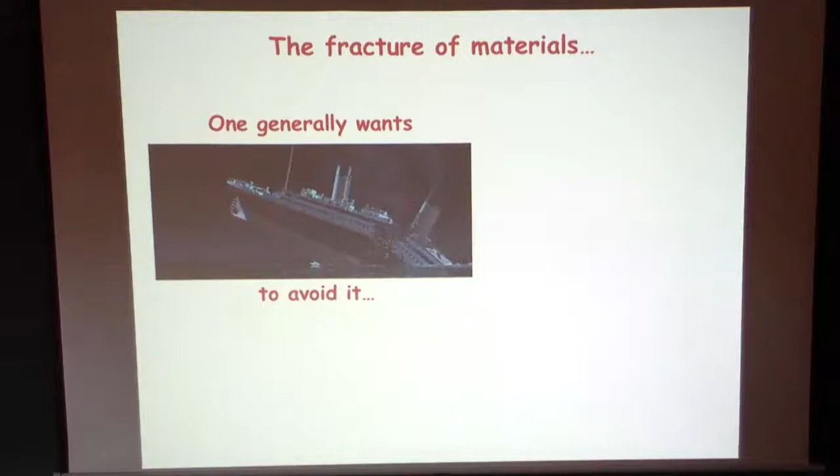So what is the main objective when we work on fracture problems? The main objective is to derive a theory that is predictive, in order to predict and avoid failure. But there is also another aspect - in some systems you want to trigger fracture, or at least manipulate fracture properties of materials.

So on a broader perspective, fracture mechanics deals with predicting fracture and also designing fracture - how to manipulate and control fracture properties of material. When you talk about material design and control, we will see that heterogeneity and disorder of material will play a key role. So we want a theory that takes into account material microstructure.

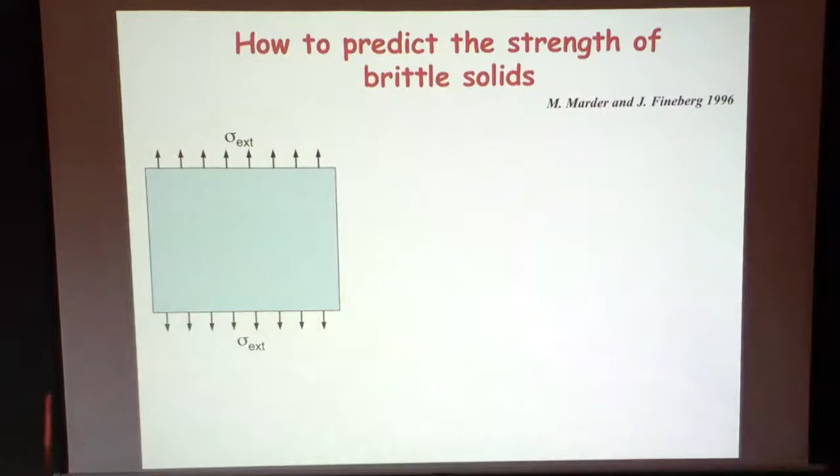All right, let's progress in the development of a predictive theory of fracture. The first naive question we will ask is how to predict the strength of a brittle solid. Here, to start with, I borrow an idea from Jay and Mike Marder that consists of taking the simplest model possible of material - a homogeneous elastic solid made of springs that describe your atomic bonds - and you want to make a prediction from it on your critical stress at failure.

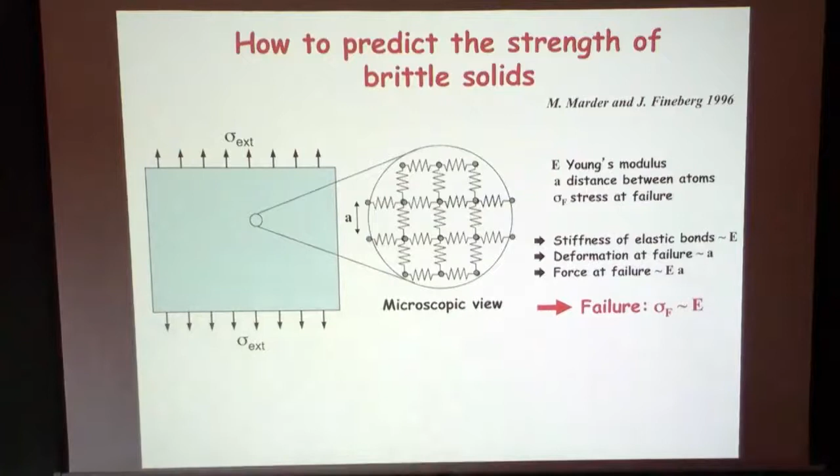You then take a failure criterion based on deformation of the spring, and say that your material will break when springs are deformed over a length typical of the distance between atoms, the interatomic distance. Then you get the stiffness of your spring from the elastic modulus of your material, from the Young's modulus, and you get a failure stress typically of the order of the Young's modulus - maybe Young's modulus over 5 if you make a more elaborate calculation of when two atoms get separated and don't interact with each other anymore.

This prediction is actually quite bad - if you take typical materials, off by about two orders of magnitude. You predict a strength much larger than the actual strength of the material; real strengths are weaker, so failure occurs much before. This is a kind of theoretical strength that is hardly achieved - it can be achieved in some ideal situation with flawless material, but it's not at all the general case.

To go a step further in understanding fracture, you need to introduce a defect - that will be key in the process of fracture. So you introduce a kind of elliptical cavity in your solid, and since you have an elastic material, you can calculate the stress field in this system as you apply a tensile stress on the side of your sample, and show that you have stress concentration, stress amplification, with the amplification factor being 1 over the square root of your curvature.

The local radius of curvature at point A - from this you can clearly see that the actual stress the material undergoes is much higher than the stress you apply on the side, and you start to understand why the strength of material is actually lower than the theoretical strength.

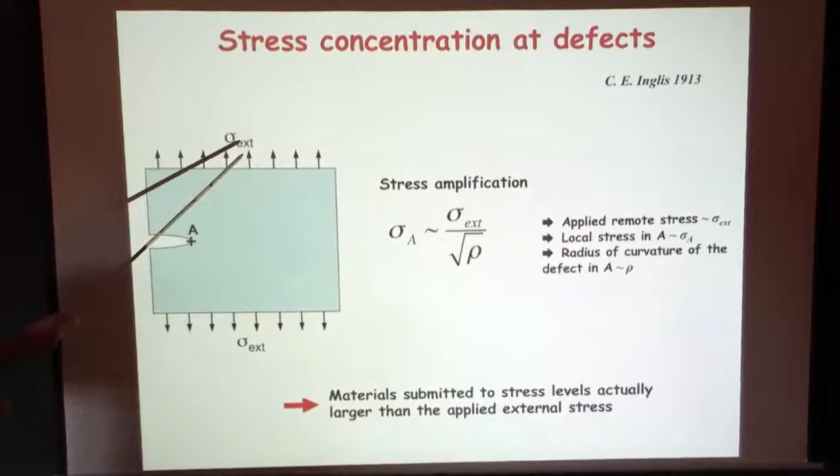So you'll recover the external stress that you're applying. But at the scale of A, or... let's say that if you move from A to a distance of the order of the radius of curvature, you recover the stress. I'm looking really at the tip, but the length scale you talk about is provided here by rho.

On the next it's very different because you cannot go from this one to the next. Since I'm considering only the stress field in A, I need to go: rho tends to 0, I have an infinite stress in A. That is consistent with the result here. At the tip, I have R equals 0, I have an infinite stress. That doesn't tell me so much.

So what's the difference between this model and the previous model? The infinite is zero curvature. Oh, and that's finite curvature. Finite curvature, okay, yeah, exactly. Rho is like microscopic then here, right?

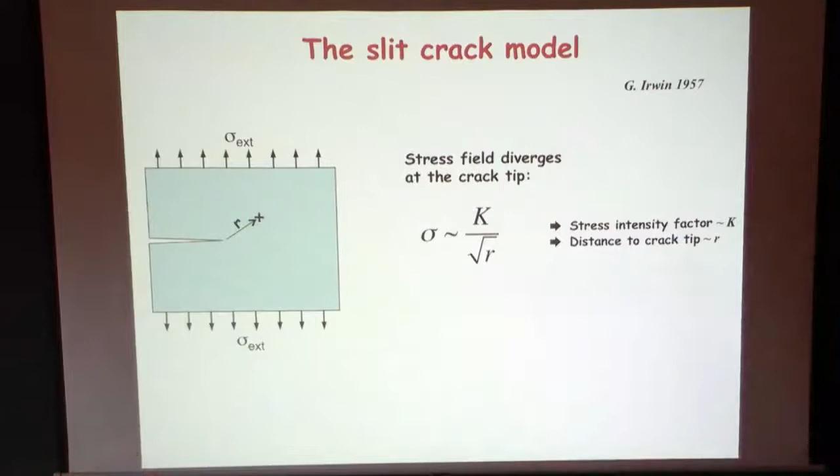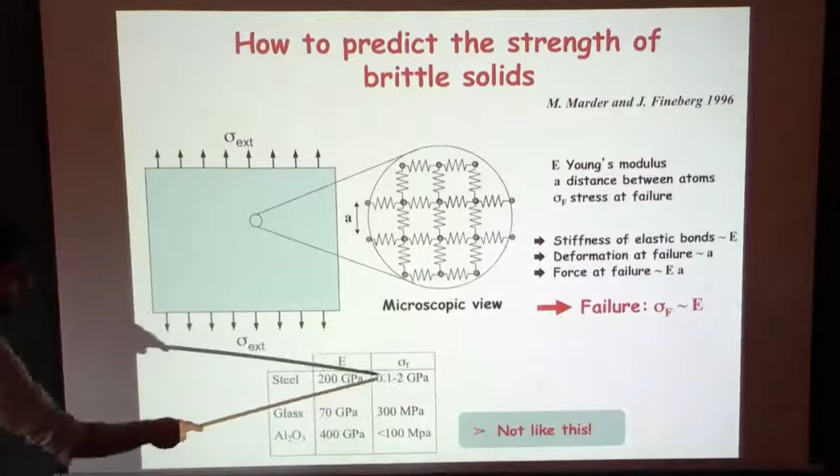Yeah, somehow this model is not completely irrelevant. In any physical problem, you will have a length scale, at least the atomic scale, or you will see later, you will always have a regularization of this singularity through a material length scale. That's not completely irrelevant. Not going to comment too much on that, but if you plug in a typical radius of curvature, you can measure maybe on a crack, you can somehow rationalize a bit the factor, the 2 decades of difference you see between these quantities.

But okay, let's move on. So if you maintain a stress-based criterion with this kind of approach, since the stress field is diverging, you will have actually no resistance to fracture somehow. If I apply just a little stress here, I will have infinite stress here, so I have no reason for the crack to stop growing. It's kind of a naive vision, but with this model, using a stress-based criterion, you will have systematically failure. So it's also not the correct approach.

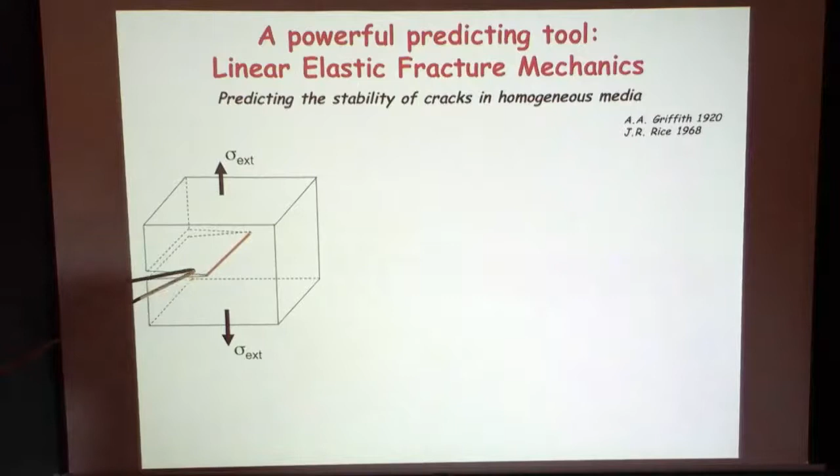Actually, a powerful way to look at the problem is to consider energy transfer, energy balance. When you have a crack in your system that is going to move over some incremental length delta A, instead of looking at the stress field, I'm going to look at energy variation. During this propagation, I have the work of the external force that is going to balance the variation of elastic energy in the solid that is under some stress, and a variation in surface energy, or an increase in terms of dissipation, because you propagate a crack, or you create new surfaces. This costs you some energy, which I note delta ES.

The idea to look at this problem is not to look at energy variation, but rate of energy dissipated, or rate of energy released. To look at rate, you gather these two terms that correspond to the mechanical energy of your system, and you look at the variation of this term normalized by the surface of propagation, delta A times B.

Same thing for the dissipation. Instead of looking at delta ES, I'm going to normalize it by the surface over which the crack moved, and I'm going to have a rate of energy dissipated to make the crack propagate over some unit surface. So I have my relevant quantities, fracture energy, elastic energy release rate.

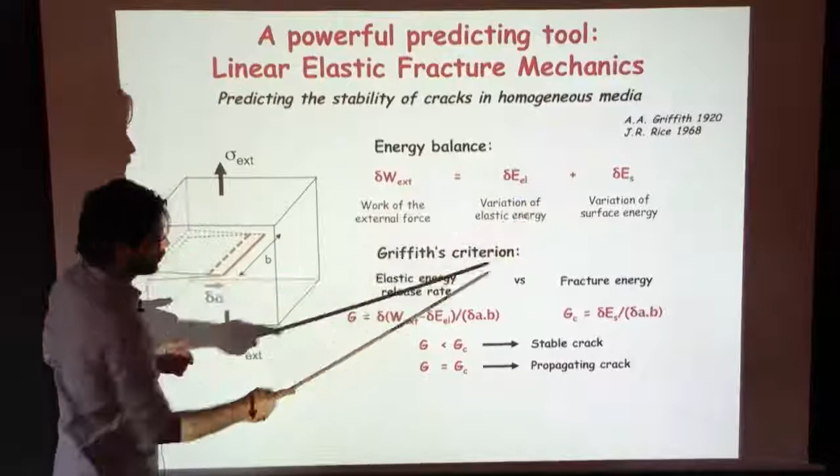From this, if you have crack propagation, if you have crack advance, then your energy balance is satisfied, and so you have G equal GC. If you have propagation, you necessarily have G equal GC. If G is smaller than GC, then the crack cannot propagate - you have your thermodynamical driving force lower than your rate of dissipation you need to plug into your system to make the crack propagate. You have a stable crack. So this is the concept of Griffith's criterion - fracture mechanics is telling you if a crack is stable or not, more or less.

The one comment I have about this is when one talks about the surface energy, one is not talking about a sharp mathematical surface. One basically has a region where elasticity works - it breaks down on small scales. You're saying, I know how to calculate the elastic energy from the large scales, so everything at the small scales that's hard, I'm calling surface. The crack may move across and it may disrupt a volume that's micrometers on either side from the crack's face, but that's all thrown into the surface.

Did I mention predicting the stability of brittle cracks? This approach can fail if you have ductile failure, if you have dissipation in the volume. But as long as it's confined to 10 micrometers or something, it's fine - quite big compared to atoms, it still works, right? Yeah, but in ductile failure you have a growing - it's the whole volume that fails. But that's a good point, and we come to that.

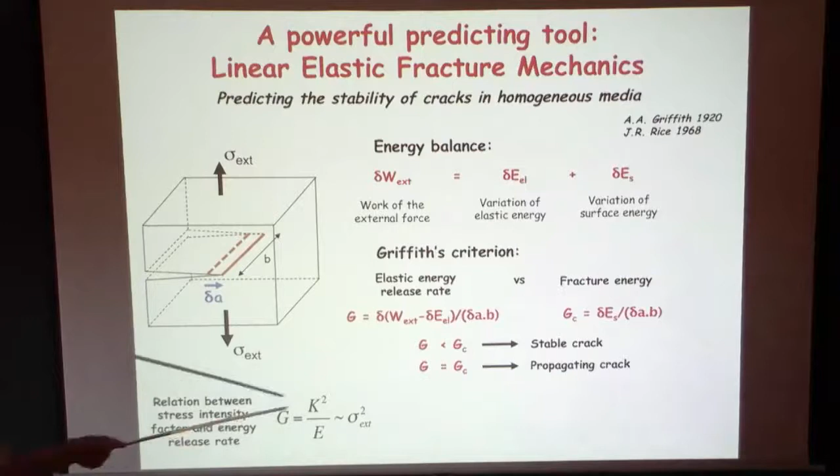So this approach is extremely powerful. It has been used to design planes, boats, and is used on a regular basis. The drawback that we started to discuss is it's limited to homogeneous media—it doesn't give you any hint on the GC, on the dissipation.

If you now want to illustrate how heterogeneity, how microstructure can be relevant in this problem, let's consider this idealized case where we have two phases, a crack propagating in a material with some toughness heterogeneity, or some elastic property heterogeneity. The singularity at the crack tip is going to make this problem very difficult, and it's going to make the fracture response of the whole system very sensitive to what's going on at the crack tip.

We saw previously that the crack response is mainly governed by the prefactor K of the singularity, but it's also governed by the value of the resistance GC at the tip. So with this singularity, brittle fracture is a propagation of a singularity in your medium. You have an extra sensitivity to local properties, and a huge effect of local properties on overall behavior.

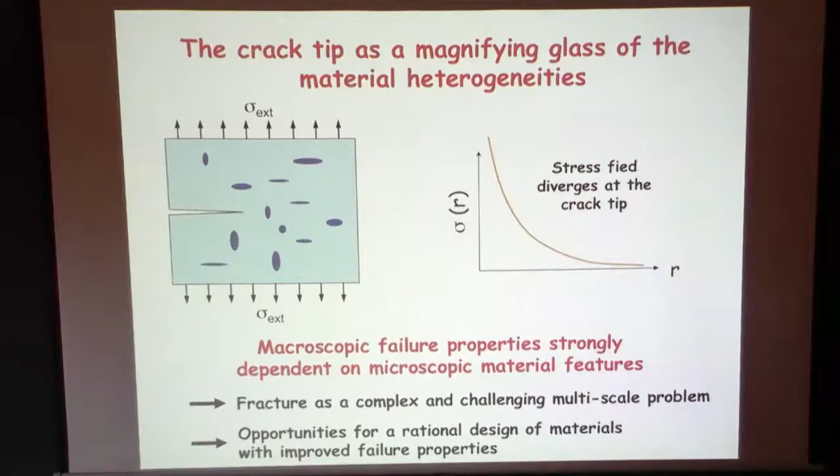That's the reason why fracture is a complex multi-scale problem. It's not simple to go from small scale to large scale. You will have a huge effect of local property at the large scale, but it's also an interesting opportunity to design, because it means that with well-designed heterogeneity or microstructure put at the correct length scale, you can manipulate fracture properties. That's also an opportunity here for material design.

Now let's go more into the actual description of fracture and crack propagation within heterogeneous materials. I'm going to consider heterogeneity only in fracture energy and focus on that. In a medium with homogeneous fracture energy, the crack is straight and the driving force is constant along the crack. As soon as I introduce some heterogeneity, I'm going to deform the crack front, and the driving force might depend on the front position.

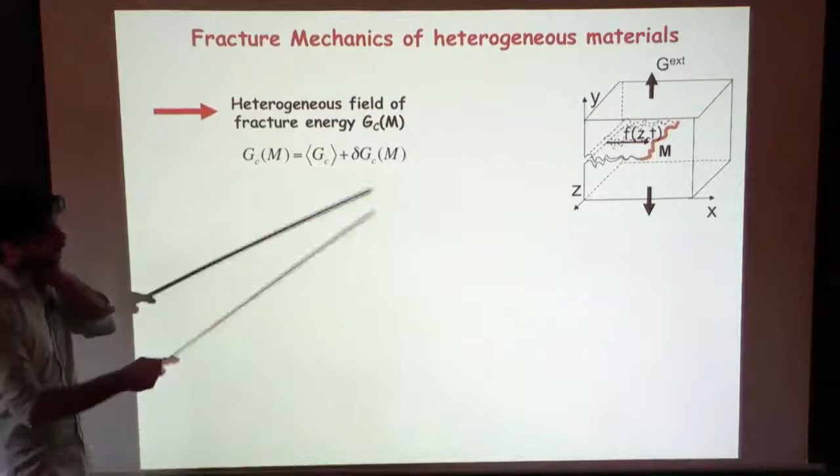So I want to rationalize this effect, and I'm going to introduce a field of fracture energy, meaning that the resistance may vary with the position in your material. It's going to be written as a constant average fracture energy plus some perturbation that depends on the location in your material. The key point is what is the value of the local driving force at some point as a function of the geometry.

I'm going to address this problem in a specific case: slow crack propagation, weakly heterogeneous material - this is important. In that case I have small out-of-plane perturbations that I can neglect at first order, and a very large sample. Under this specific condition, you can have an analytical expression for the driving force at some point as a function of the geometry of your front.

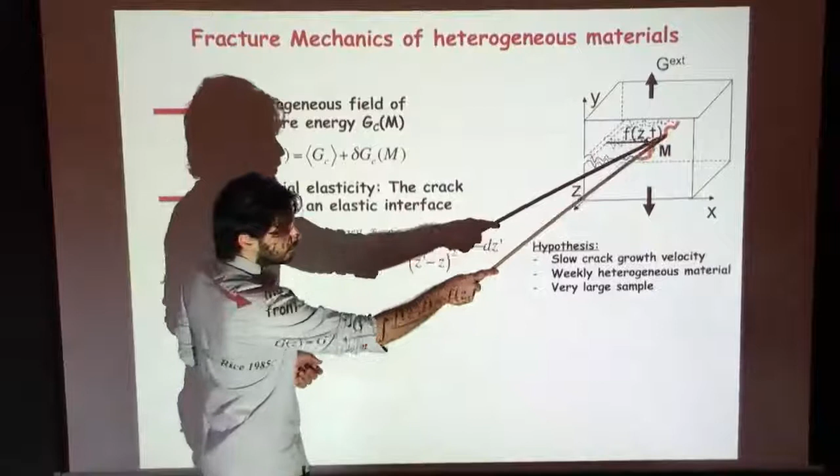This is the expression. You calculate it through development of the stress field using perturbed boundary conditions, and it's written as a constant term plus a perturbation - a non-local perturbation, telling you that the driving force here depends on the full geometry of the front. There's a minus f here, telling you that if the front is late, the driving force is slightly larger than the average driving force Gext, and if the front is in advance, the driving force is slightly smaller.

That's why I call it a pseudo-line elasticity. The distribution of driving force along the front tries to maintain the front straight. This non-local term - one more comment - arises from the fact that if you have a perturbation here, it perturbs the stress field in a whole area around the perturbation, so you have an effect on the long range.

So basically, my understanding is that the integral part is really the line tension part. Yeah, you try to stretch it flat, right? That's all, that's it. It's a specific kind of line tension - if you have a sinusoidal perturbation of the front, the restoring force is in 1 over the wavelength, while if you had a classical local surface tension line, you will have 1 over the wavelength squared.

Then you have your driving force in this problem, and you have your resistance. You also need a kinetic law, telling how the crack propagates - what is the velocity of the crack at some point. It's a local propagation law as a function of your driving force and your resistance. The simplest propagation law you can think of is proportionality. You can show that it is also the law you expect from dynamic fracture mechanics, but under some specific conditions.

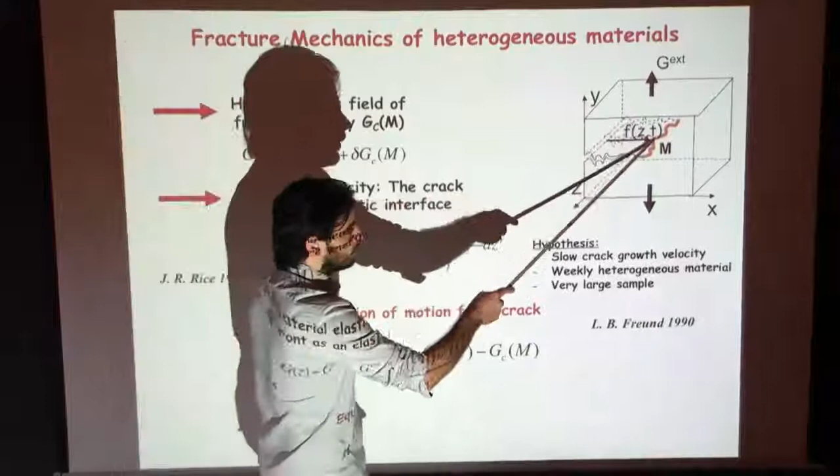So just a naive question: I don't really understand, what is M? It's a point along—it's a point on the front. Why isn't it just given by really f of z of t? I mean, I don't understand. So f of z, comma t, completely specifies the crack location of the crack.

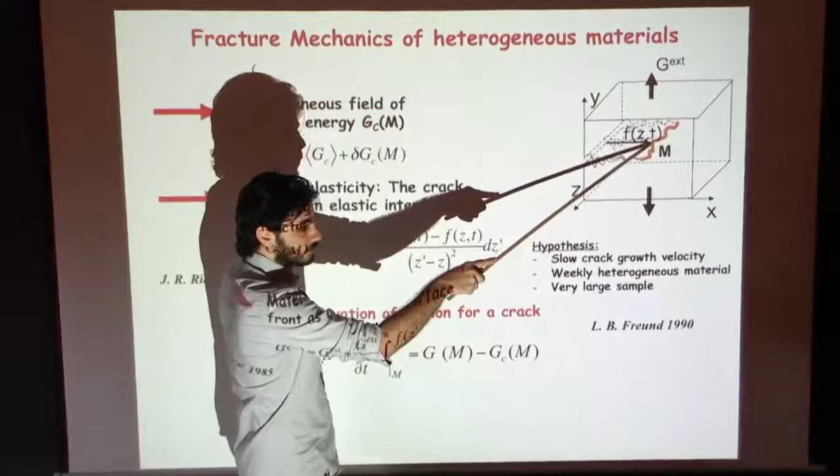I want to insist that it's a local propagation law that you apply at every point along your front. And let's consider this point. Along the crack, along this orange line, yes. And at this specific point, I can predict the velocity, the local velocity of the crack, that is going to move forward if G is larger than GC. It's actually the discussion we had a bit before.

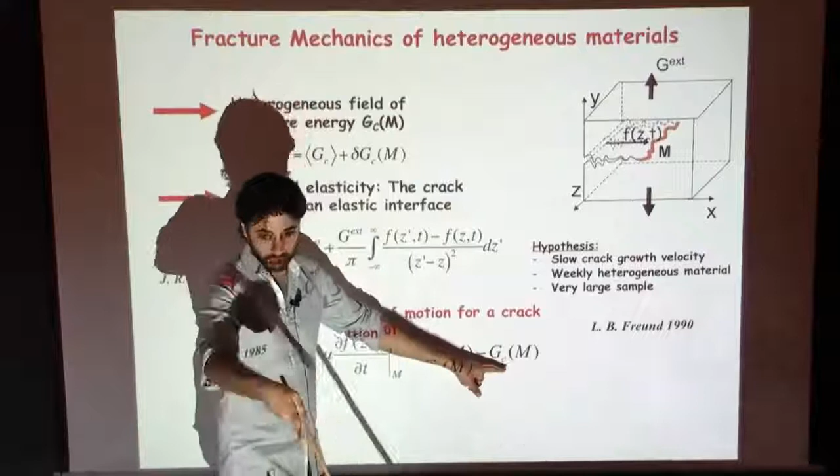And actually, this is not completely correct. If G is smaller than GC, you have zero velocity. Is the Griffith criterion applied locally at every point? About this term, I can think of G as a functional of f of z. So is this just notational, is my understanding? Yeah, sure.

Let me gather the term above, and then maybe it's going to simplify things. That's true, G is a functional of f, and it just depends—it depends on f only. So f—I didn't mention the in-plane perturbation of the front. I assume very small out-of-plane perturbation, weakly heterogeneous material, so I neglect the effect of out-of-plane excursion of the front.

The stress field, then you plug—you apply your local fracture energy on the front you are considering, and the complexity in your equation arises from this nonlinearity. If you didn't have that, you have a linear equation you can solve in f, but because of the presence of f, your unknown, inside the heterogeneous term, you get into big trouble.

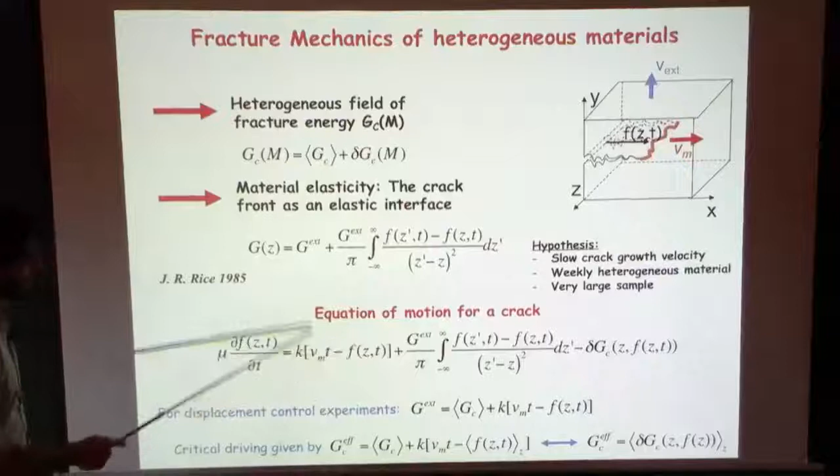In most experiments, we don't impose the load, we don't impose force or stress—we generally impose displacement. So that's not such a big difference. If you impose, for example, an opening velocity, you can show that the term that were there, G ext minus average GC, actually is going to simplify into this term. In other words, imposing a velocity here is going to impose a velocity of the front through a geometrical factor.

Both are proportional, and you will have an effective driving that is a rigid bar moving at velocity Vm, that is the average crack velocity, pulling on your elastic line with some spring of constant k. And k, we can calculate it, depends on the geometry of your sample.

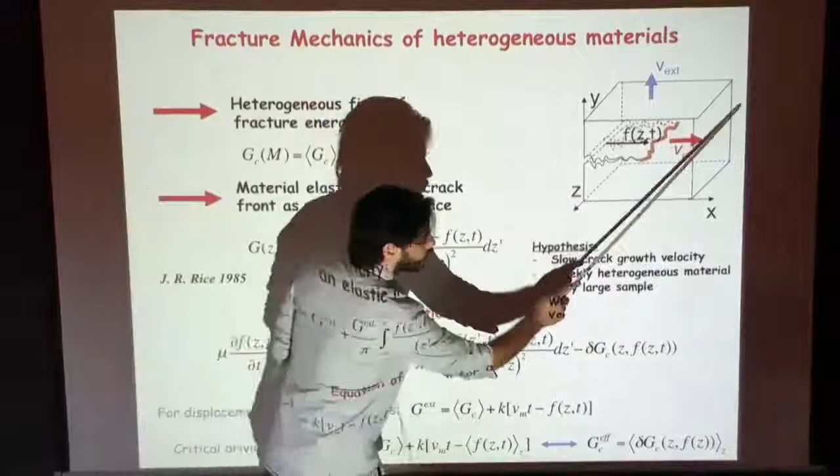So this gives you an effective driving through springs, and also from this equation you get the spatiotemporal evolution of your front, but you also get the driving. If you pull at constant velocity, you don't impose the force at which you pull on your sample, you predict it using this formula: the distance from the position of the rigid bar pulling on the line to the average position of the line. If you plug that in, you realize that the effective resistance of your solid is the average of this term over Z.

So my main point here is that the front geometry tells you what is the resistance of your material. Simply because the front deforming picks up some local properties that are going to set what is the macroscopic property. So determining front geometry is key in this problem.

I see in your equation, mu doesn't depend on Z. Is that a really good approximation, or do you worry about that? Actually, we should ask specialists of elastodynamics. Whatever term you take, we take a homogeneous term, but this value of mu doesn't change many things. So mu we take it constant, and over a large range of values it doesn't affect the result. What you finally obtain is G equals GC along the front, as much as you can. So what you're saying is the time scale doesn't really matter anyway.

It's a good point. It's setting a time scale, but it's setting the time scale at which you move from one metastable state to another. If you are quasi-static, the final metastable state does not depend on mu. So that's why it's sort of okay that it doesn't depend on Z, because you don't really care about it. Actually, if we believe that the elastodynamic theory works, you can calculate this mu, and it's related to the velocity of sound in your material. But when you look at this value, it doesn't seem very reasonable from an experimental point of view, so it's kind of an effective mobility. It's not so clear right now, but we are lucky it doesn't affect so much the results.

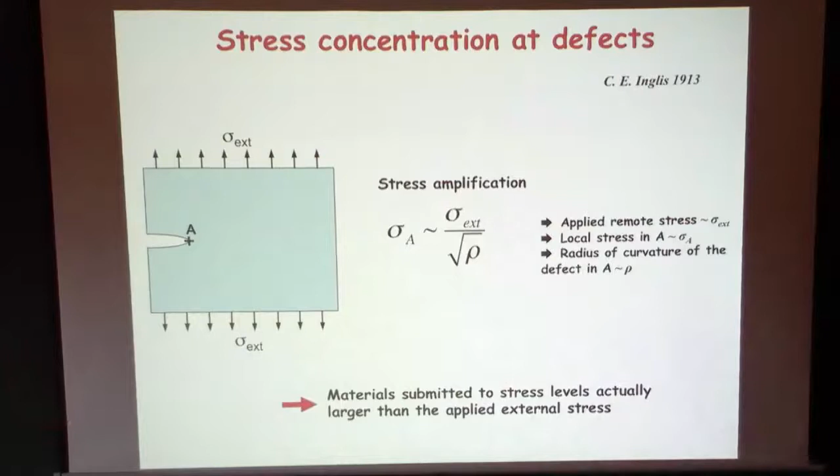So if you pre-stress it or something, do something like that? We'll talk about that, an example. We talk about the singular. Okay, if you start from this problem, for example, if you load this sample, since you don't have a stress singularity, you have to load it a lot before the crack actually starts. And when the crack starts, you have a lot of energy in your system that makes the crack accelerate.

But that elastic equation is implicitly assuming that you're minimizing the energy subject to the boundary condition of the crack, and that's only a valid approximation to the state in the limit where it's quasi-static. So as soon as the crack moves away from that, the whole thing breaks down everywhere. Can you estimate mu? No, only measure it. You can calculate it assuming it's a singular field. It's about 10 to the minus 3, because it's the average GC over the velocity of sound. So it would be about 10 to the minus 3.

But it's a kind of, okay, can be discussed. If you have some dissipative process, I think, I'm not sure this value is applying in the general case.

To investigate the prediction of this equation, there is an experimental system that is actually simpler than the 3D fracture problem. The difficulty with 3D is the transparency: how do you observe a crack in a material, and how do you control heterogeneities in the system? Well, now with new techniques like 3D printing, you can start to deal with these problems. But this system is somehow simpler.

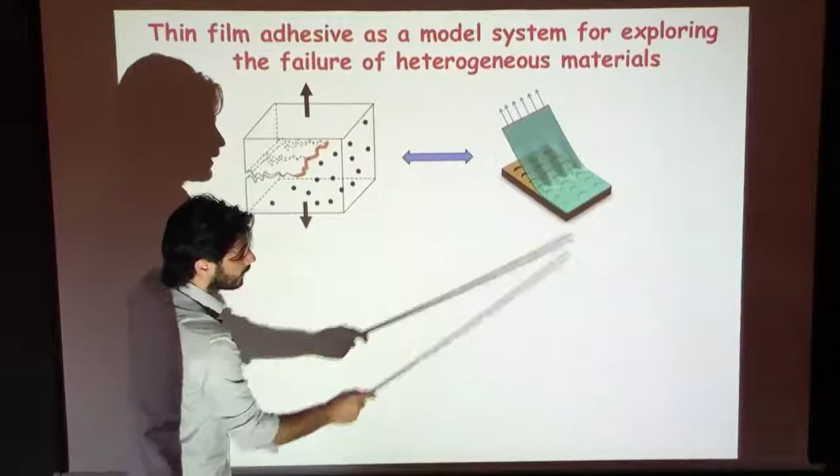The crack is confined to a plane. It's a peeling of an adhesive from a heterogeneous substrate. You can look directly at the front shape, and you can pattern the surface with heterogeneities.

Does it make sense from a physics point of view? Yes, it's not so different from the crack problem. You can also derive an equation of evolution. The same idea arises: the mechanical energy you input into your system by the work of the external force is used to peel your system. So you have a transfer of mechanical energy towards adhesion energy or fracture energy.

You can also consider perturbation of your front, and the pseudo-elasticity of your line is of the same type as the crack front problem. The only difference is the factor 4 — here you have an elasticity of your line that is 4 times larger than the crack front elasticity, so you will have an amplitude of deformation 4 times smaller. But that's not a big price to pay.

The applied driving force has a different expression as a function of the geometry of your system and loading. Instead of being proportional to the square of the applied force, it's linear in the force, and there is a dependency on the peeling angle, but that's not a big problem either.

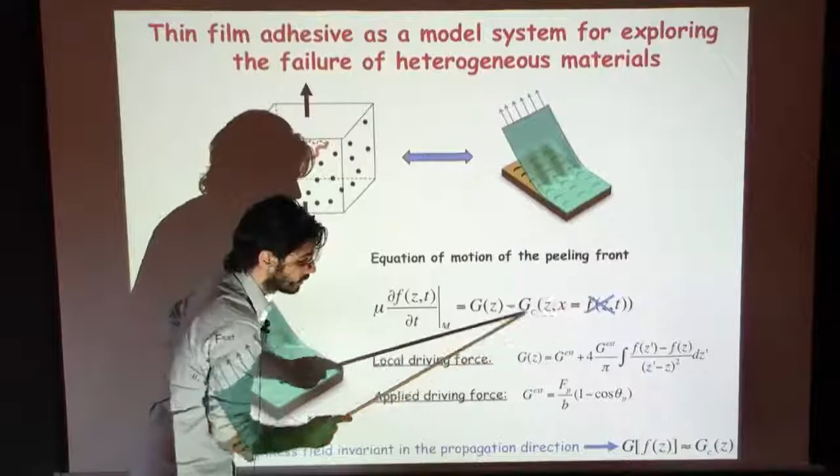So the first application, to somehow compare the model with experimental observation, is to consider a perturbation with toughness field or fracture energy invariant in the propagation direction. Then I get rid of all the complexity I talked about previously — I don't have the unknown geometry of the front inside the heterogeneous term, and I can solve the solution analytically.

What do I have if I impose Gc independent of X and depending on Z only? I have a stationary front shape that I can predict and compare with experiments.

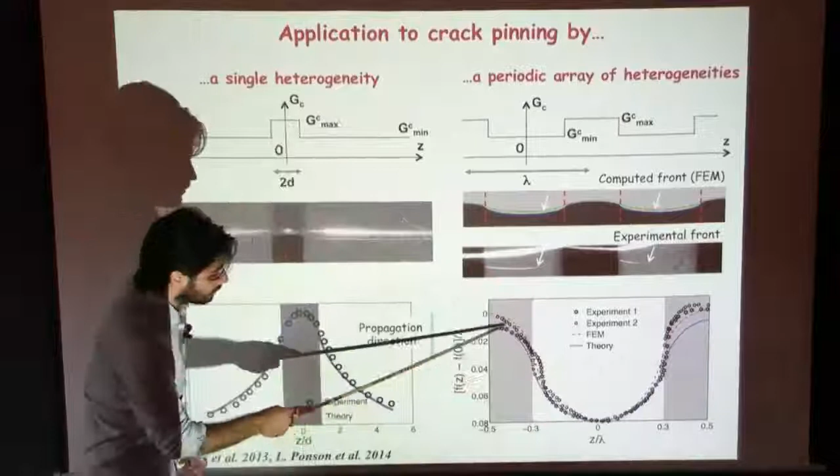In the elastic term, I'm confused why the thickness of the adhesive and the substrate didn't enter. Shouldn't that be a cutoff on the kernel?

So the substrate is rigid — you have a wrinkling elastic plate, and you can use bending theory to calculate the excess energy you need to pay in deformation to deform it like that, and calculate the driving force.

Actually, each time, since you normalize by Gc, there is no extra h dependency — actually we cannot have h dependency. It's the limit as h tends to 0. It's a thin plate theory model, so the perturbations you consider are necessarily larger than the thin plate thickness. That's what we use, the thin plate thickness.

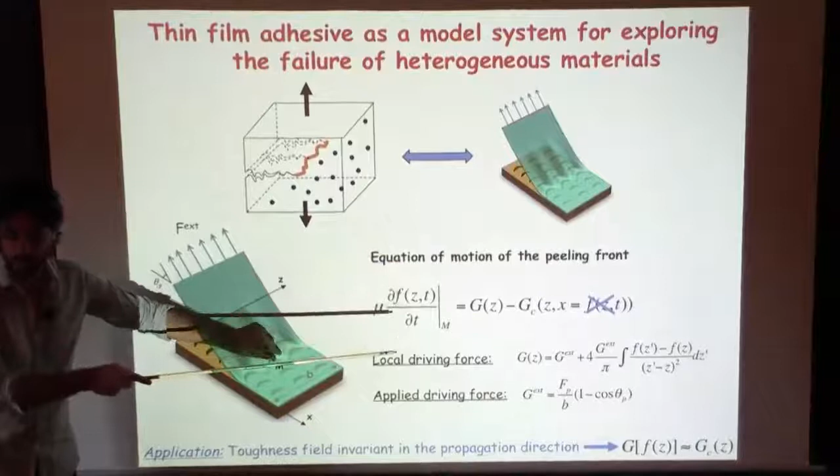You will always end up with this kind of non-local kernel. So the only difference we can have is the prefactor, the amplitude of the elastic term. You also have different cutoffs. We started to discuss: if you have perturbation of the order of the thickness, this doesn't work anymore. And if you have perturbation of the order of this bending length, radius of curvature, you have other effects. So the differences are in the cutoff, in the amplitude of the terms, but not in the non-local term.

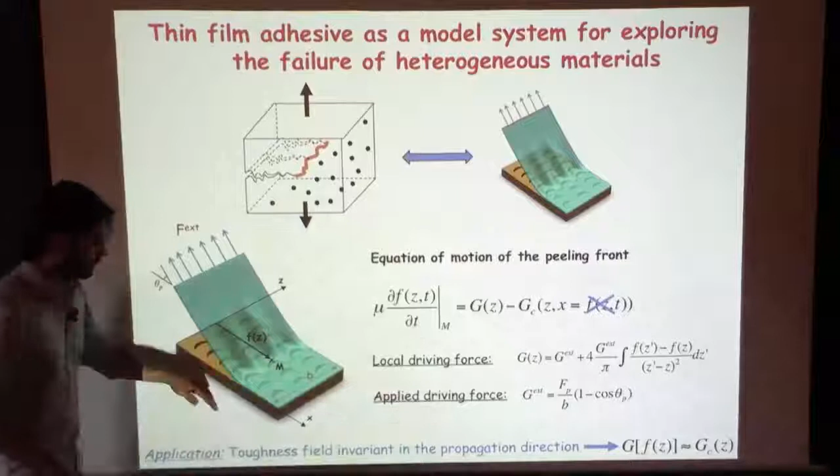From the plate theory you can go into this, but it's nothing really universal. If you go to smaller angle, you will have the effect of stretching, and then this prefactor is going to depend on your peeling angle. So there's nothing really magic. As long as the peeling angle is larger than some critical peeling angle, you get this, but it can change with the peeling angle at small peeling angle.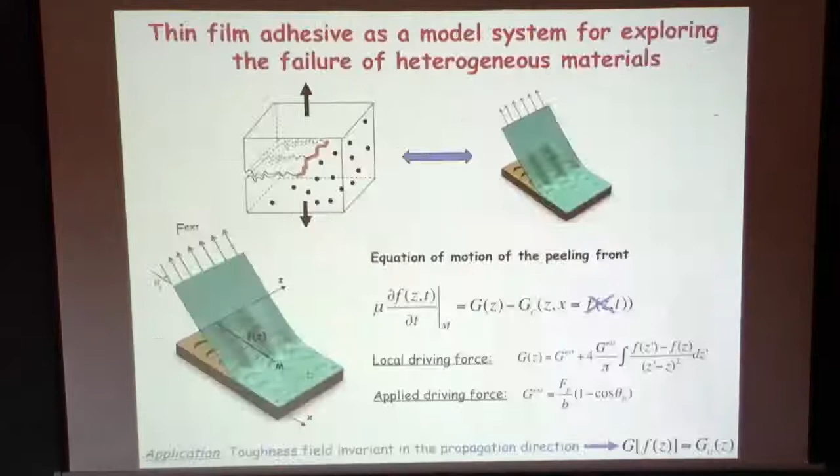And so the shape is supposed to be a logarithm as you move away. Here it's a logarithm, right there. Here there is not a simple form you can write.

Okay, before moving to disorder, if I have time, moving to disorder system. Now you have a model that can be predictive, both for the shape of your front and for predicting the force. I didn't discuss it, but you can predict force using the model. You can use it for design.

This has the idea of a system where you want to have a peeling response that is different when you peel your system one way or the other. So what can you do? You can use a model to find a shape that makes the peeling asymmetric, and what you find is that this moon shape type of peeling site does a good job.

The idea behind it is what we discussed: the front shape selects local properties. So if the front deformation is different as you go this way or this way, the force will also be different. Then it's a game of finding which shape does the better job of having different resistance in both directions. So here, experimental front as you go this way, here are the calculated shapes.

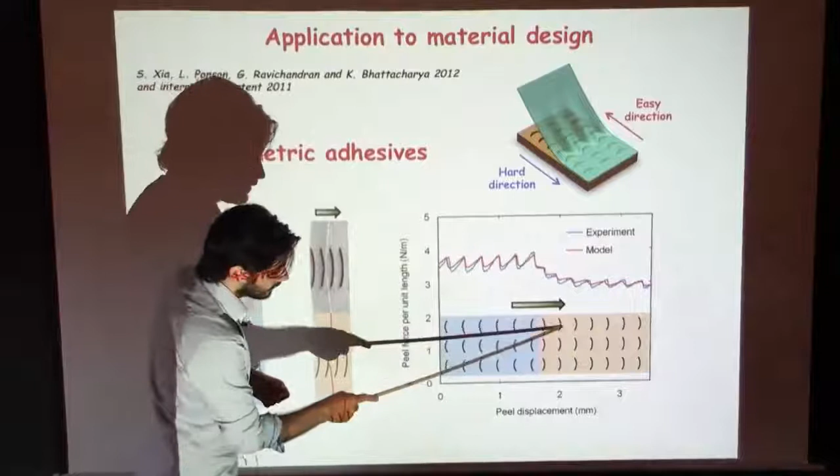And here are also the forces, the pinning force that you get by integrating GC along your line here in this way and here in this way. So the mechanism is just that the front gets trapped along a line that is very thin and feels a lot of tough material. While here, when it attacks the defect in the other way, it feels a very thin line that it can cross by staying almost straight, as we can see here. Just at the very end it feels some tough material.

So that's just an illustration of how you can use defect heterogeneity to control, up to some limit, the effective resistance of your material.

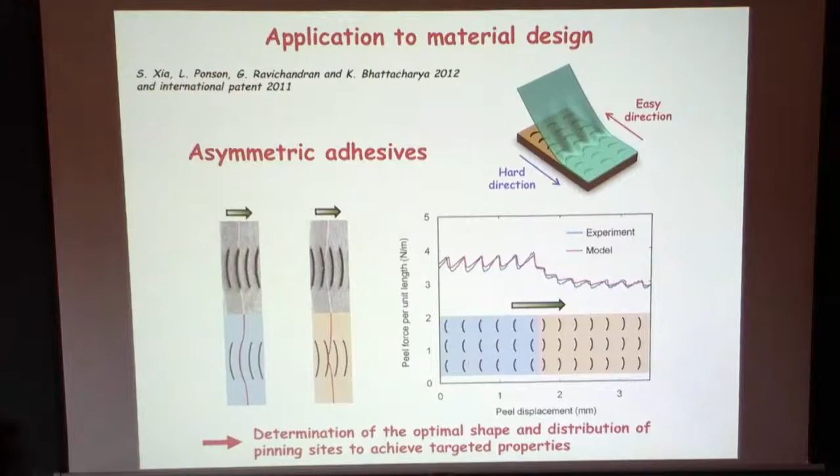All right, so now let's move to the second part of the talk. I wanted to discuss crack propagation in heterogeneous media. I'm sure many of you recognize the equation of evolution of the front as one of an interface with long-range elasticity that gives rise to a depinning transition if the heterogeneous term is disorder, a stochastic quenched noise.

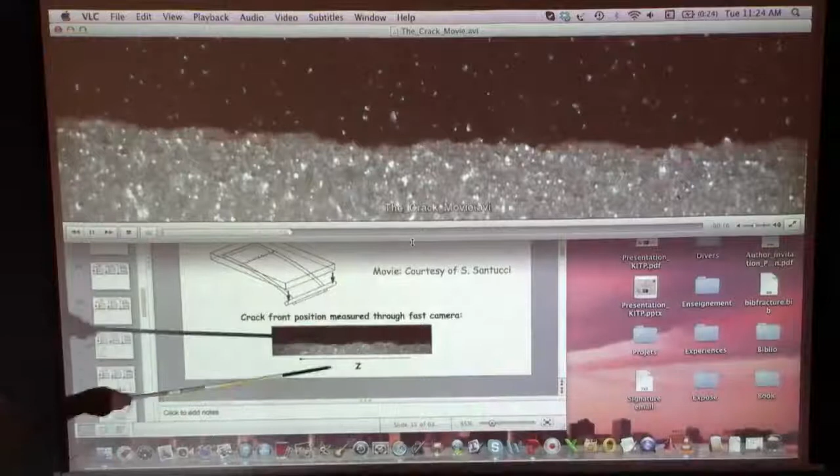This was the idea, I think, of the experiment designed by Maloy in Oslo, to make a crack propagate through an interface with random spatial distribution of defects. How this is done: they use two plates of plexiglass, sandblast one of the plates, stick them together, and make the crack propagate.

At the interface, they measure the crack front position using a fast camera. They record it at high frequency, and you see an avalanche-like dynamics. This typical size is a few centimeters, and the movie is accelerating. I think it's 1 minute.

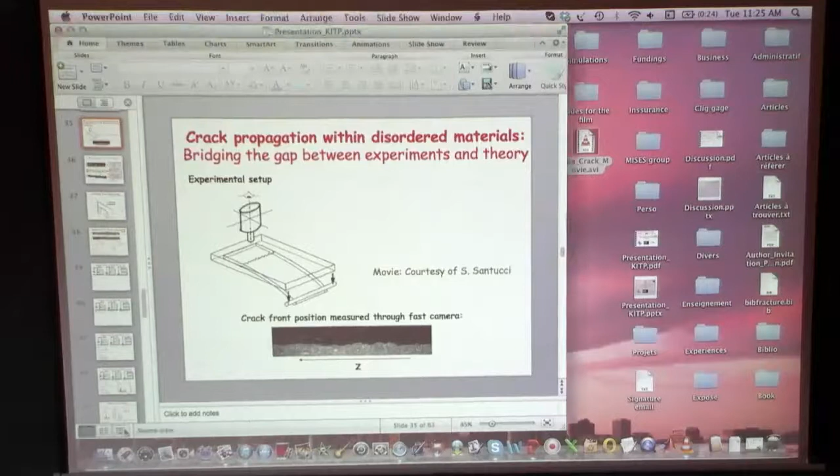So there has been a lot of work to rationalize this avalanche-like dynamics. That's why I entitled this 'Bridging the Gap Between Experiments and Theory.' How far can we go in the understanding of this dynamics using the model I presented you?

There has been a lot of work, mainly from the experimental side, to find a proper system where you can measure the expected properties from the depinning models. I'm going to review some of them, and also highlight the limitations of the theoretical approach. So how do you characterize the front evolution, the local spatio-temporal evolution of your front?

This was the idea of Maloy, Stéphane Santucci, and co-workers. For each image, you record the front location, then you plug it into a matrix that corresponds, for each pixel on each image, to the time spent by the front there. So there is 1 millisecond spent in each of these boxes, and as you use many images corresponding to different times, you fill your matrix and get a waiting time matrix telling you how much time the front spends in each position.

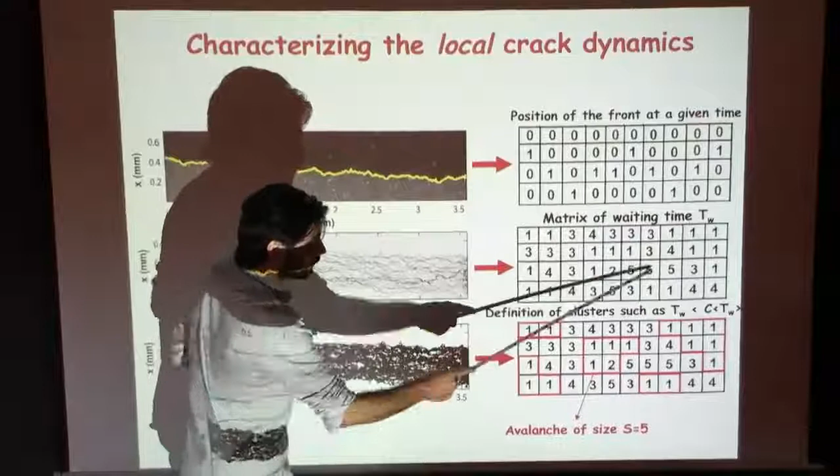Then you can threshold it, keeping only waiting times smaller than some threshold, a few times the average waiting time. In white, I have zones where the front has spent very little time. In other words, in this zone the front has moved from this location to that one. So it defines clusters that you can define as avalanches.

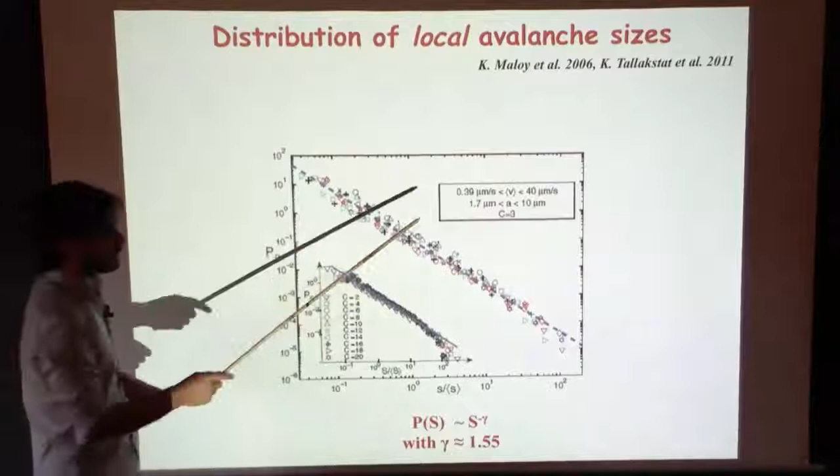The quantitative characterization of this cluster leads to power law statistics of its size. In particular, Knut and then further students showed that they were power law distributed with an exponent close to 1.55. In this experiment, they change the velocity, vary the pixel size, play with the threshold, and this is a robust property. These are spatially connected clusters defined at the local scale.

Using the depinning equation presented before, the Gc term in the equation uses a quenched noise, meaning that at each point of your surface you take the fracture energy from a Gaussian distribution. You have a disorder field of fracture energy, and you use this equation to simulate the propagation of the crack quasi-statically. What you observe is a very intermittent dynamics where the crack front is pinned into some configuration, then moves to another through avalanches. You have this characteristic spatiotemporal evolution in space, representing the time spent in each pixel by the front. The white region corresponds to zones where the front has visited very rapidly.

You can also define pinning avalanches. Here, the white regions are zones where the front has spent a lot of time, an abnormally large amount of time, and you see lines corresponding to pinned configurations.

You can play the same game, analyzing the statistics of the size of this cluster, and actually rationalize the values found in the experiment with the non-local model.

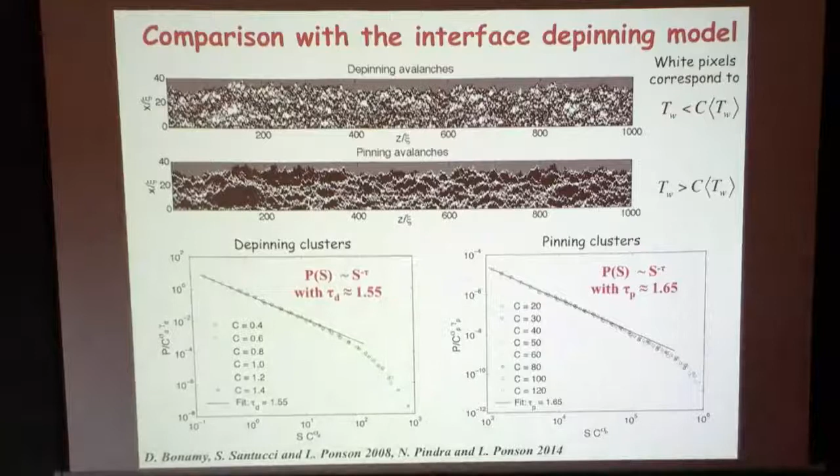Laura, may I ask you one question about this tau exponent? Are the avalanches connected or not? Yes, exactly, these are connected avalanches. And it's not the area you were saying, it's the line, it's not...

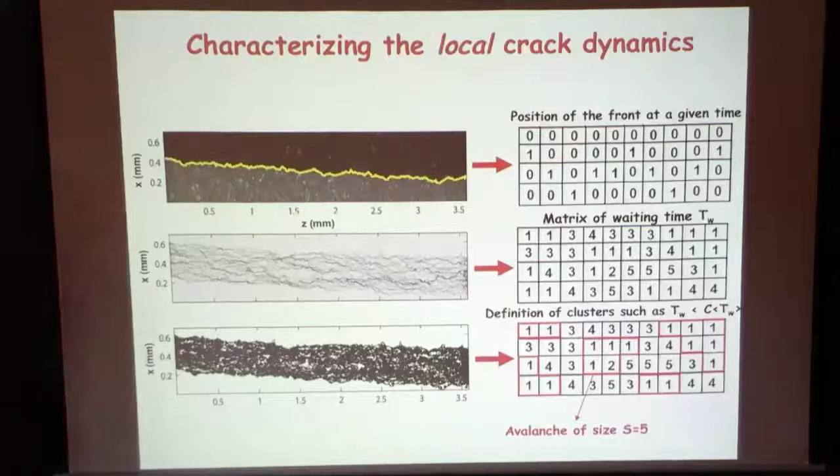Here it's obviously the depinning cluster area. You count the number of pixels, and you have an area of a zone where the front has moved very rapidly, in a vision where at time t the front is somewhere, and at time t plus delta t, your front will have moved forward.

And it's with this definition of waiting time that helps you define this kind of cluster. But didn't you say you were using a line before? No, I'm not really using a line. I'm doing the same thing, counting pixels of white dots that are connected. When they're not all connected, that's the line break. Parts of the line may move while other parts don't, so it disconnects. You see the values of C.

To define this white line, you need to multiply the average waiting time by some constant, and here you need to go to very large values to actually, as you said, not have only one single cluster. As you go to larger and larger values, it's really a heuristic procedure that's been validated in experiment and simulation, and makes a reasonable job.

Then I don't know if this exponent makes sense for pinning clusters, the ones which stop. Yes, the depinning one moves. And do you have—because there is a scaling relation for the exponent tau if you consider the full class, the ensemble of all the avalanches that move at the same time, no? I'll get to that, I'll get to that, but that's true. We can make a first comment. Okay, I'll make this comment later.

Okay, so now we're going to look at intermittency from the macroscopic scale and look at avalanches at the global scale. The idea is to come back to the fracture process, which is nothing but the transfer of mechanical energy into surface energy, or fracture energy.

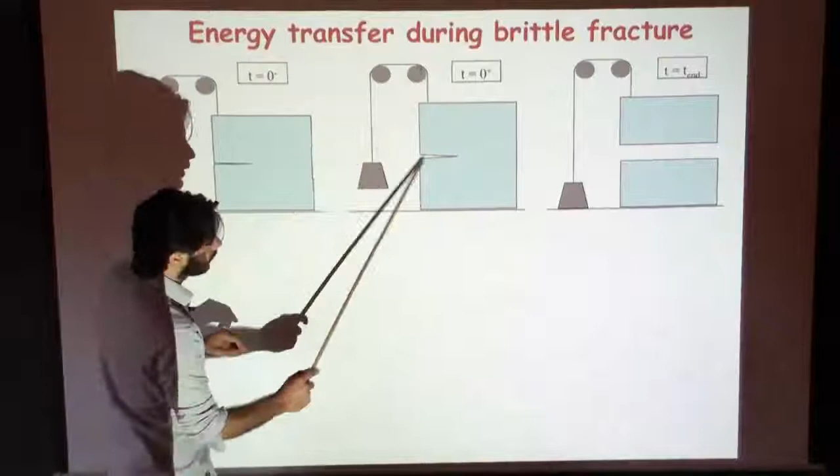Let's take this little sketch where you start with—I'm going to use a dead load because it makes the system perfectly isolated. I have a dead load that I'm going to let fall. It's going to pull on the material and let it fall as the crack propagates. So I'm loading my material with a constant force, and I have an isolated system, and the total energy through this process is constant. It's composed of the mechanical energy, potential energy of the mass, plus the elastic energy of the elastic solid, and surface energy.

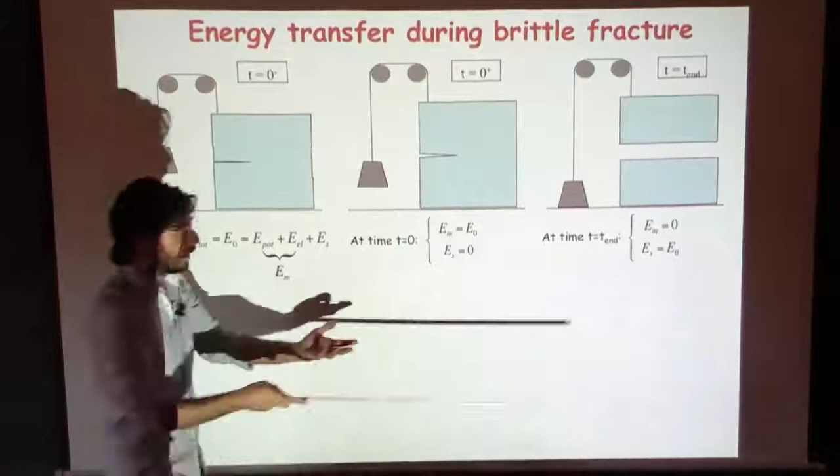The fracture process is the transfer of this mechanical energy—the potential energy of the mass at time t equals 0—into surface energy, so that at time t equals 0 I have an amount of mechanical energy, and at time t end I have no mechanical energy; it's all transferred into fracture energy. Okay, I have this transfer. The whole question is how does this transfer take place?

And it takes place in a very intermittent manner, as we will see. First of all, I need to define this quantity, the rate of energy transfer, which we already somehow discussed previously. It's a variation.

It's the power of energy dissipated in fracture, or in surface energy. It's also the opposite of the rate of variation with time of the mechanical energy. We introduced this quantity before because it's related to the energy release rate, G. So actually this definition is straightforward: it's G times delta EM, which is G times the surface crossed by my crack. So it's G times F dot times delta T times dZ, integrated along the front.

And the delta T—you get rid of the delta T. There's a B showing up from the definition of G. And you end up—you can develop this term in two pieces and show that more or less the rate of energy transfer from mechanical to surface energy is proportional to the average crack growth.

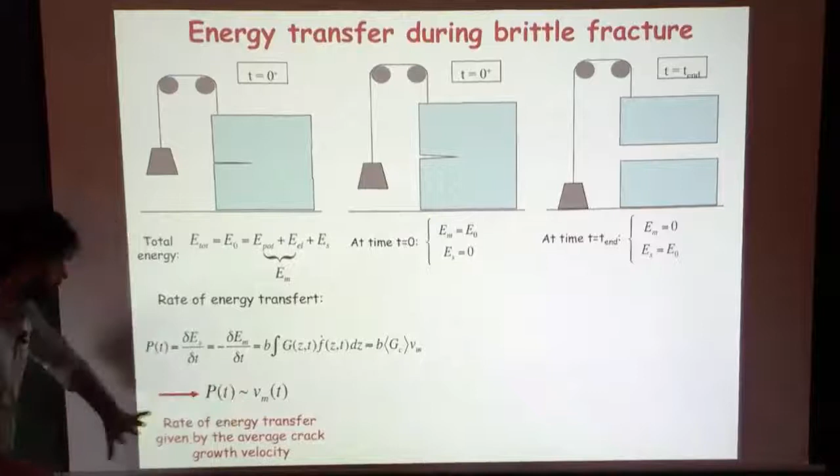The constant is the average fracture energy times the film, the specimen width. In other words, if you want to know the rate of transfer from mechanical to surface energy, you look at the velocity of your crack front, the average velocity of your crack front over Z. Vm is averaged along Z, not along time. This can vary with time. So this is a very practical way to look at the rate of transfer, and that will actually be the physical quantity in your problem.

Can you—so this is an average over weak and tough regions, whereas your maximum force and maximum resistance is just the average over when the fracture is arrested, what you defined before, so what should be larger?

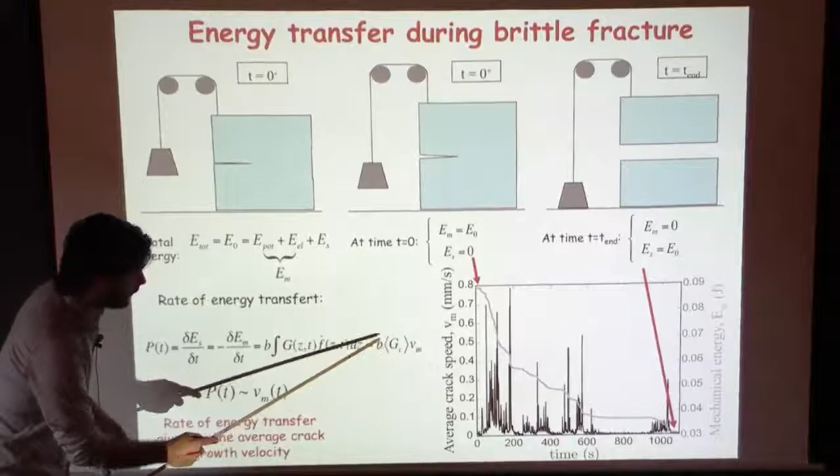You talk about this passage from here to here. I didn't explain it, but this you can develop. This term is G0 plus delta G, and G0 is this simplification - probably we can discuss it later. This simplification arises from the development of G in terms of zero order, first order. But this is the spatially averaged fracture energy of your material.

I'm looking at energy conservation - how the energy is dissipated during this process, I don't even see it. I'm looking at the mechanical energy of the whole system, that is an isolated system, how it goes into the surface energy, the fracture energy. I would say as long as what we discussed in the first slide holds - you have a fracture energy proportional to surface, etc. - this holds.

He has written it on the top. It's brittle fracture, not - yeah, but okay, in brittle fracture you can allow some plasticity localized at the tip. You just have it localized. You need the main hypothesis to use fracture mechanics: small scale yielding, fracture process zone small compared to system size.

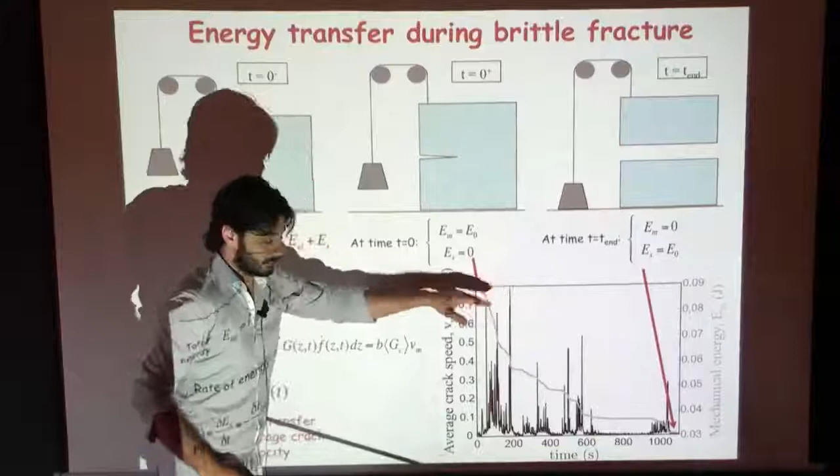And the velocity that I represented here is the rate of energy transfer. You clearly see that when you have a drop in the mechanical energy, you have a large velocity. So if you want to have the rate - the energy transferred from mechanical to surface over some time - you just integrate the velocity signal, okay? You have a constant prefactor, sure, but okay, that's the idea.

That's why we want to focus on the average velocity of the crack. That gives a lot of information about the avalanche defined from an energy perspective.

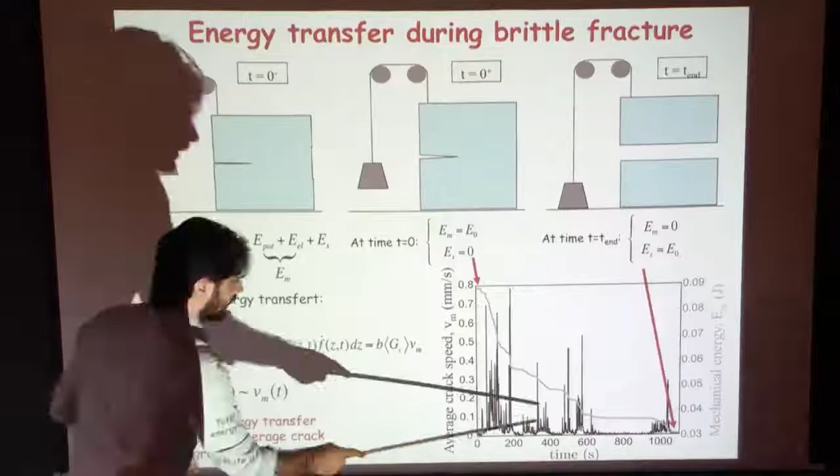So now, if you want to define an avalanche, or the burst of energy you transfer from mechanical to surface, you need to integrate your velocity signal from one point to another - from the beginning of the avalanche to the end of the avalanche. That's what we do here.

That's what classically you do, and that's what Jonathan Barés and Daniel Bonamy have done in artificial rock. They worked on a designed heterogeneous material to measure these avalanches, and they recorded the velocity signal as the one shown before, and defined avalanches using a threshold.

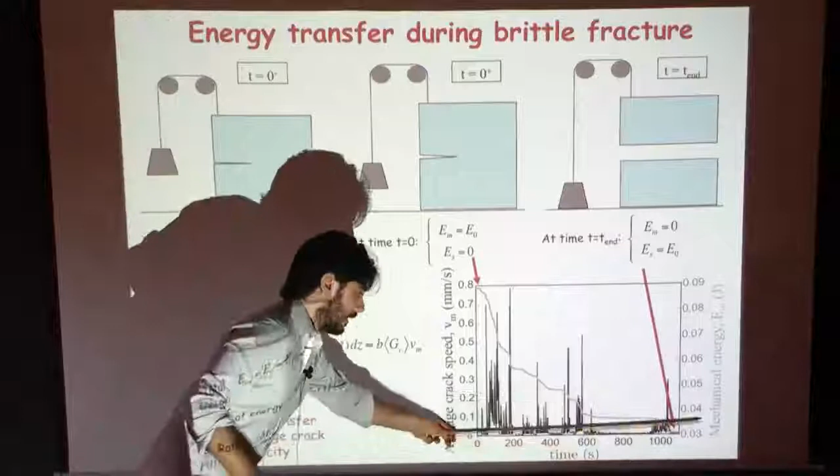As usual, you never really go to exact zero velocity, so you need to define a threshold, and you define avalanches as bursts of transfer of energy, and you get the amount of energy transferred by just integrating this curve. Remember, V is the power of energy dissipated, so you integrate it over time, and you can look at the statistics of the size of avalanches defined in energy.

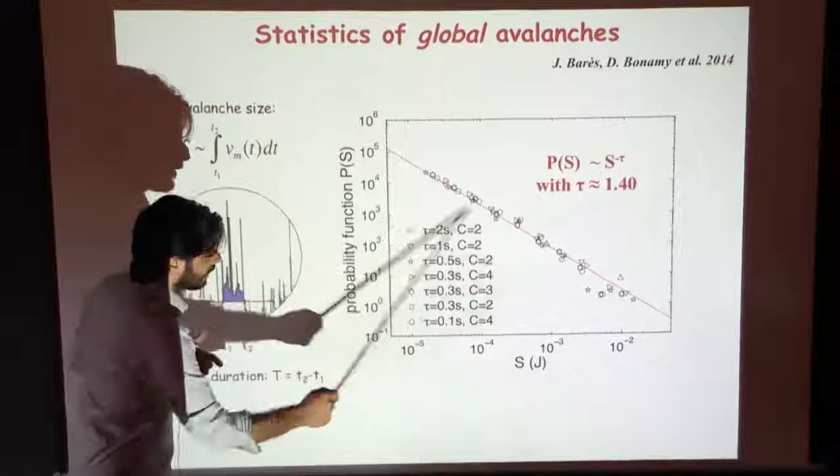From an energy point of view, they observe power law statistics, with an exponent close to 1.4. That is a bit that can be compared with the prediction of the depinning model, which is slightly bigger. Okay, this also we can discuss - different scenarios why it's slightly bigger, but the comparison is not completely stupid.

No, I would like to make a comment on the values of the distribution of macroscopic avalanches, that is distributed with an exponent 1.4, and the distribution of local avalanches that were distributed with an exponent that is slightly larger.

Actually, in this long-range elasticity problem, when I have one macroscopic avalanche, at the local scale I can have many small avalanches. This is the picture you will get at the local scale if you look at t and t plus dt, where v of t1 - I will have a signal like this - at t1 plus delta t. So during one avalanche, my front will have moved at different spots.

So it means now if you look at the distribution in terms of energy of big avalanches, you observe something like 1.4 through the macroscopic measurement of this energy. And now if you look at the area - here you have several areas - you see that big avalanches might be composed of several small ones. So instead of having one big avalanche, you will have many small ones. Okay, so you're going to feed this part of the curve, the big avalanches, with smaller ones.

So you're going to break in pieces the small ones, the big ones, into multiple small ones, and you move to a slightly larger exponent. This is a qualitative scenario that might explain why you get an exponent slightly larger when you look at local avalanches compared to bigger ones. But we talked about the fact that you can have quiescent periods even as part of a causal avalanche. So this one may also be too big, in the sense that energy is seen as one event that's part of something that's causal.

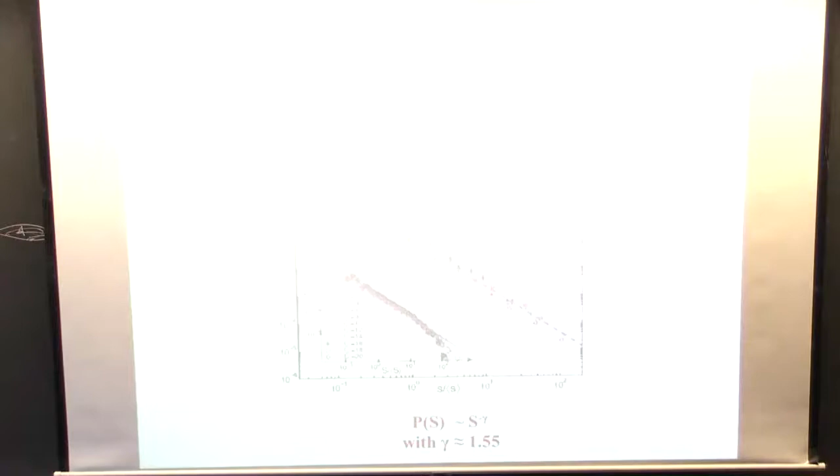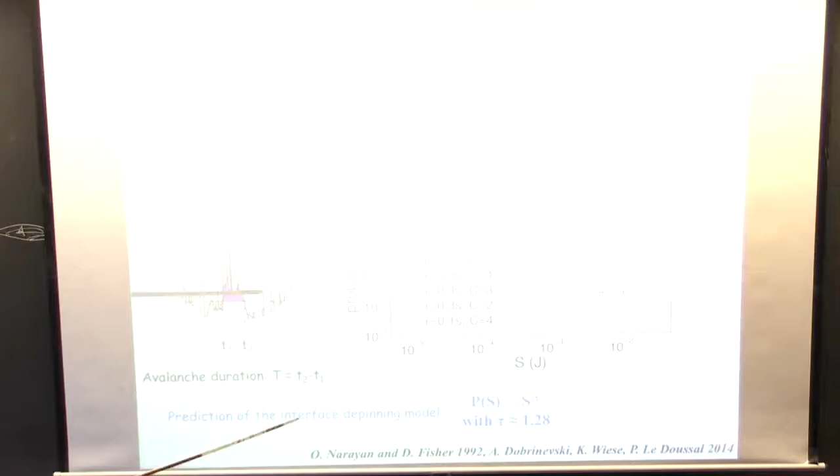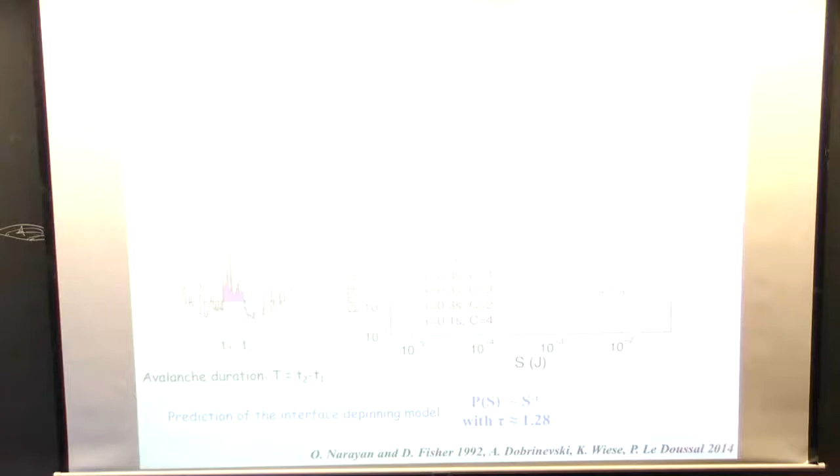So wouldn't these exponents then be dependent on the cutoff time or something? As you see, they depend a little on the cutoff, but not so much. That's a good point. If we lower the cutoff, the problem is you're never at sufficiently small driving velocity, so you never really separate avalanches — they all take place one after the other, continuously. So if you have zero cutoff, then you have one big avalanche. You mix avalanches that should not be the same one. So you have a trade-off between low cutoff and large cutoff. This exponent will just get steeper, as Mark said.

Okay, even these ones where you think it's local — if you look close enough, maybe that's also smaller patches and things. You have the same threshold problem on the local avalanches. Yeah, that's a good point.

Are these data acquired with optics or just seeing the differences? No, these are from a global measurement, a macroscopic measurement of energy. So then you have the disconnected regions together.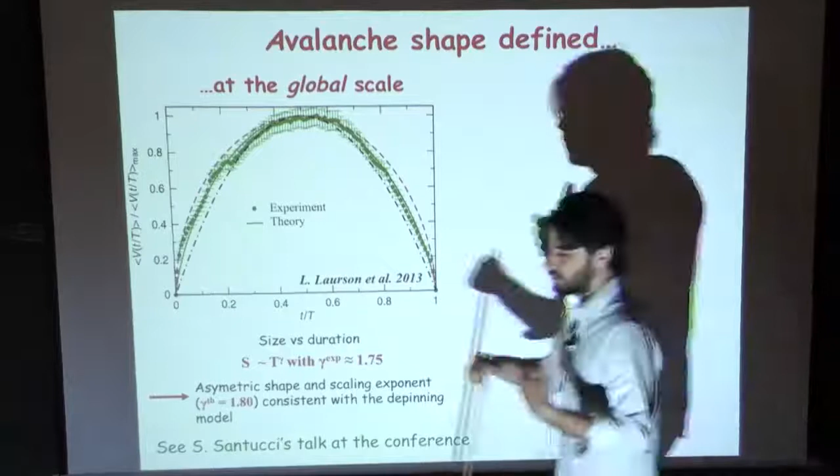Probably a way to clarify all these points is to look at several quantities, not only the macroscopic avalanches, which are probably the ones that average a lot of things together, so probably not the most relevant quantity to distinguish between models. Another, maybe more efficient way, is to look at the shape of avalanches. I won't say too much about it — Stéphane will come to the conference to present this work.

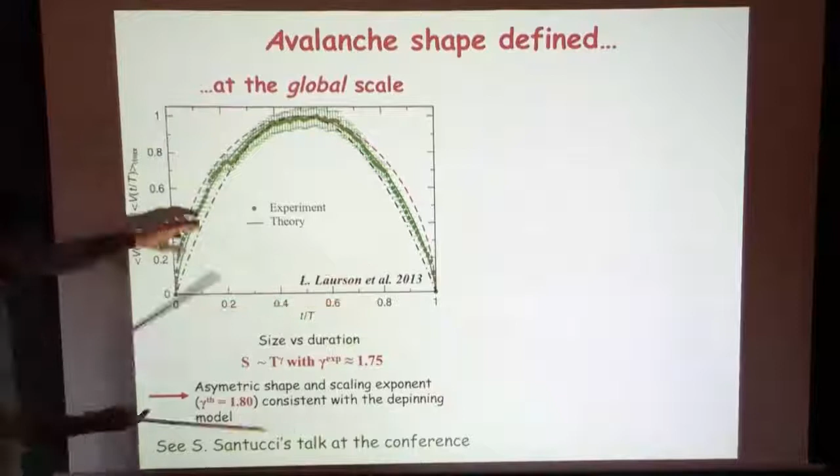But you can now look at — should switch on the light again, but, oh, I have a drawing here — the average shape of these avalanches. You average over many of them, and you normalize by their duration, so they all have the same duration, and you average out all these avalanches. You also normalize their amplitude, so they all collapse onto the same curve with a lot of noise, and when you average these avalanches out, you find this shape.

And in this work with Laurson, Mikko Alava, and co-workers, they compare with the theoretical model with long-range elasticity, and they found reasonable agreement. The red and the black are other models, short range or other kinds of elasticity. They also, interestingly, found a scaling between the size, the duration of the avalanche, versus the area — the size, the energy of one avalanche — with an exponent close to the one predicted by the depinning model. So at the global scale, the avalanche shape seems to give a closer result than the statistics of avalanche size for the depinning model.

This has not been done so far in the experiment. We can also look at the local scale and the average cluster shape. Now you ask, what is the typical size of this cluster? Here you have a slight asymmetry — it's really not obvious to see that. Karin, tell me if I'm right. It goes...

It goes slower, starting slowly and finishing more rapidly. The rate is slightly... The asymmetry of the avalanche in the long-range model is shifted toward the right.

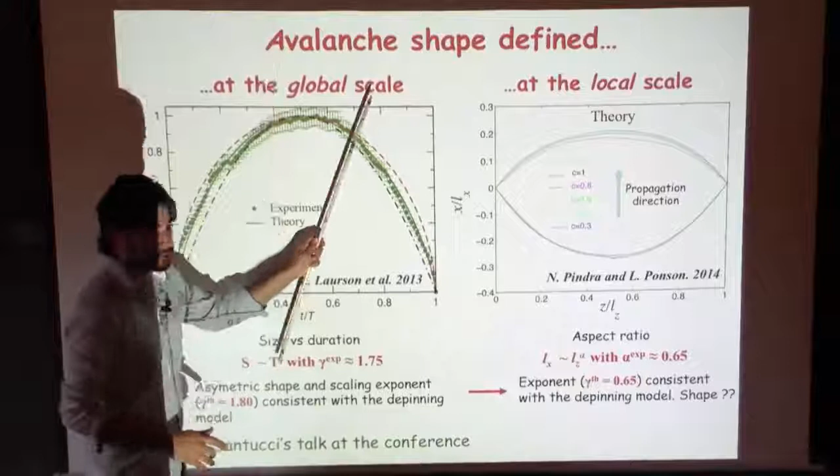You have inertia, you say? No, there is no inertia here, it's a long range effect. In this paper they claim that due to the long range elasticity, you have a slight asymmetry toward the right part for the depinning model.

The mean field is a parabola. No, it's not mean field here. Using the numerics, resolving the equation of evolution numerically, you also see that the average shape of the cluster is asymmetric.

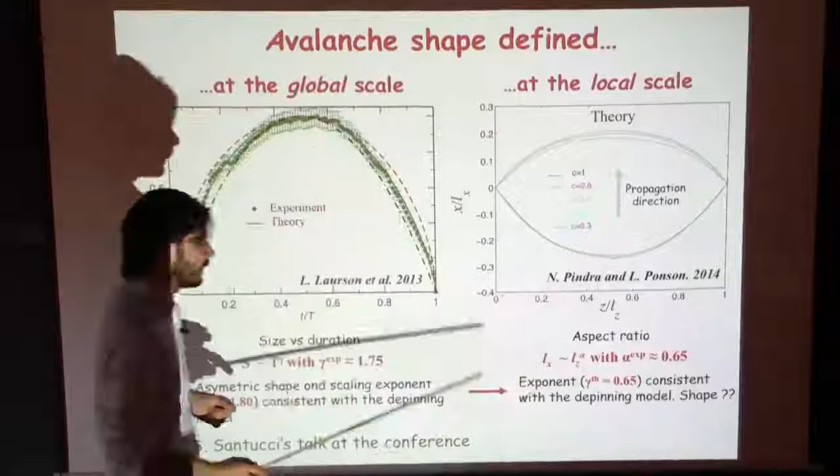This is the propagation direction, so it's more extended backward than outward. So you have a kind of feeling how this avalanche can develop. They can start here, propagate spatially, and close up this way. The shape has not been compared with experiment, but the aspect ratio follows a scaling law that compares well with the experiment.

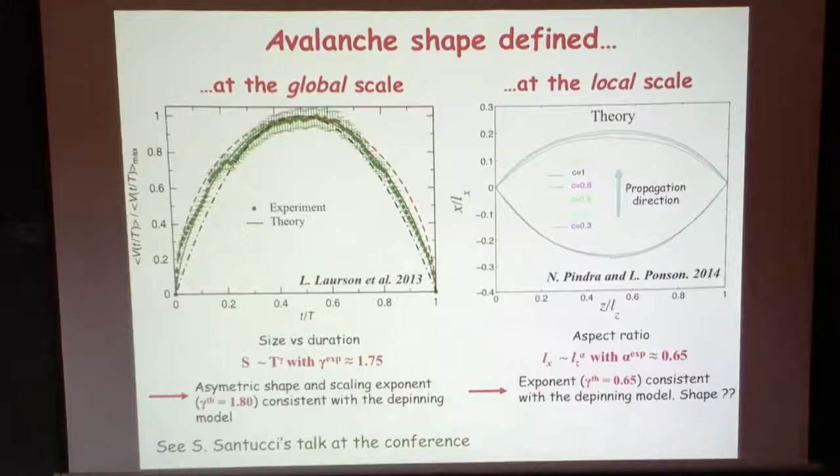So what is the upper curve versus the lower one? The clusters have a kind of shape, a potato shape, and this is the shape. Lower one is before the avalanche, and the upper is after? No, look, I have areas.

Each cluster provides me an area with an upper limit and a lower limit. The propagation direction is this way. So the upper limit is the upper curve? Yes. Lower limit is... yeah, sure.

How do you set x equal zero? Well, there are different procedures. I think we center this. Yeah, we center everything.

We took the maximum and plug it in. Okay, this is the zero. This is the middle. Yeah, we have a procedure where we pick up the middle of the cluster that we plug here.

In the average, you also pick up because you have avalanches like this, there is an angle, right? Yeah. You're picking... No, we maintain the original shape and average them. We don't orient or rotate them. Yeah, okay, we don't rotate them.

There could be maybe a systematic error, I don't know if it's an error, but the front will propagate normally to itself, it won't propagate in a given direction. So if you take that into account, it could change the statistics. Yeah, it might improve the average.

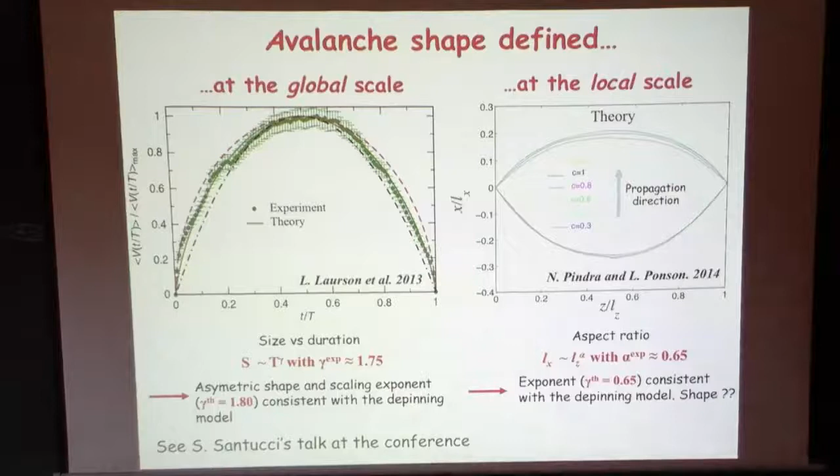Improve or whatever. So, Laurent, would you say that the depinning model explains, or helps interpret your results? No, I'm going to the conclusion. It's not so clear, but A is the roughness. Yes, exactly, this aspect ratio is defining the roughness of your clusters. So I'm going to this point, to the conclusion actually.

So your question is, does the depinning-like model do a good job at rationalizing all this experimental data? My first response is yes. They can capture many things. We discussed the avalanche dynamics. It makes a rather good job rationalizing all this experimental observation, up to the value of the exponent, to some limit, but I would say it's a reasonable agreement.

It's not only that. There are also other interesting predictions of the depinning model that work well on the crack front problem: the roughness. Recently, people measured the roughness exponent, and they measure a 0.4 prediction that can be made from the model. You also have the average crack dynamics. These two points I didn't talk about.

You can actually measure the depinning transition. If you measure the velocity, your average velocity versus driving, you can see this so-called depinning transition where the velocity goes from zero and evolves as a power law of the distance to the critical threshold.

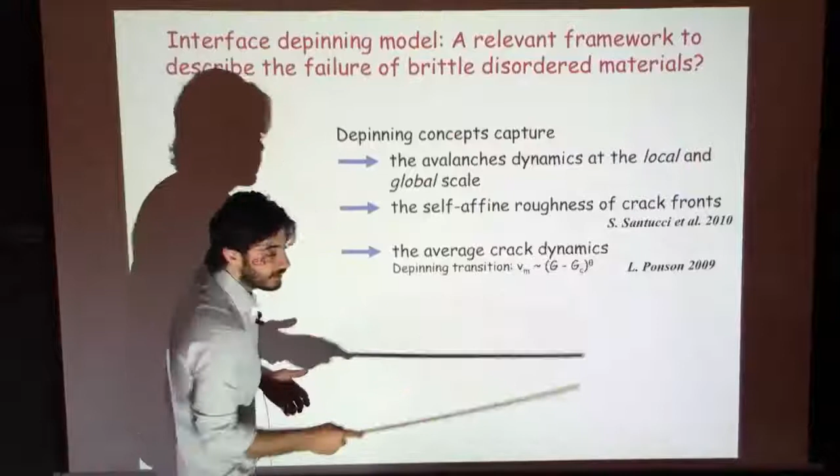So you can really explain a certain number of things, but you need to look at a fracture problem under very specific conditions that are not the general case. I've quoted two specific restrictions that make the model apply.

Then you really need an infinite, very large system. This is due to the fact that if you want your kernel of elastic interaction to remain the one we have set up, we need to have the avalanche size and front perturbation characterized by a length scale that is much smaller than the sample size. This is really a big restriction that has not been respected in many experiments in the 90s, at the beginning, where it was difficult to rationalize observations, and that is still a big problem.

A fracture takes place in a finite size sample, so if you want to compare prediction with experiments, you need to take specimen widths in this direction very large with respect to avalanche size. That's really a key point.

Another thing is you need a scale separation between the material heterogeneity and the size at which all the dissipation takes place. This black box is assumed implicitly to be very small with respect to the heterogeneity size. But in materials, dissipative processes take place at the microstructure scale, because that's where you have heterogeneity, where you have a mess, where you find a way to dissipate energy.

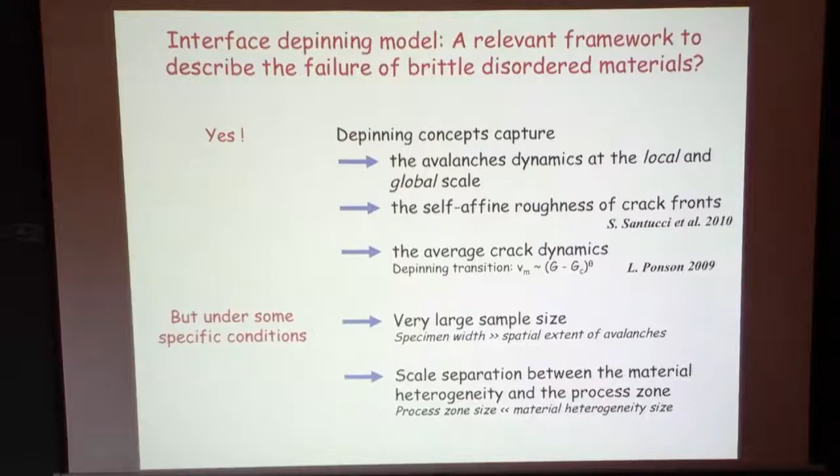This is very pretty, but if I took my glasses off, or something, and said okay, I have all this random pinning, but there's some mean that you talked about. And if I go and increase the scale of the loading, why can't I sweep this under the same rug that we call dissipation and forget about it?

Or if I turn it around, I can think of a crack going through a homogeneous material. But then if I put my glasses on and make them into a microscope, there are always a million defects in any perfect material. So I once again get to the limit where I have these pinning centers, but still continuum fracture mechanics works because it's a number, or something.

So how? Okay, that's the key. Okay, the key response, but it can be debated by all of us. Is that...

The cutoff size of these avalanches, the maximum size of this fluctuation, is bounded by the system size. Especially when we talk about brittle fracture, there is no length scale between the heterogeneity size and the system size. That's why I have all these power law distributed objects. So the larger your system is, the larger the fluctuation will be.

For some cases there isn't always crackling. But when you have crackling, it's not easy to define a representative volume where you can put this fluctuation in and then smooth it out. I'd say this is like the earthquake problem. The intermittency is macroscopic. It's not a microscopic correction you can smooth out by taking a sufficiently large volume.

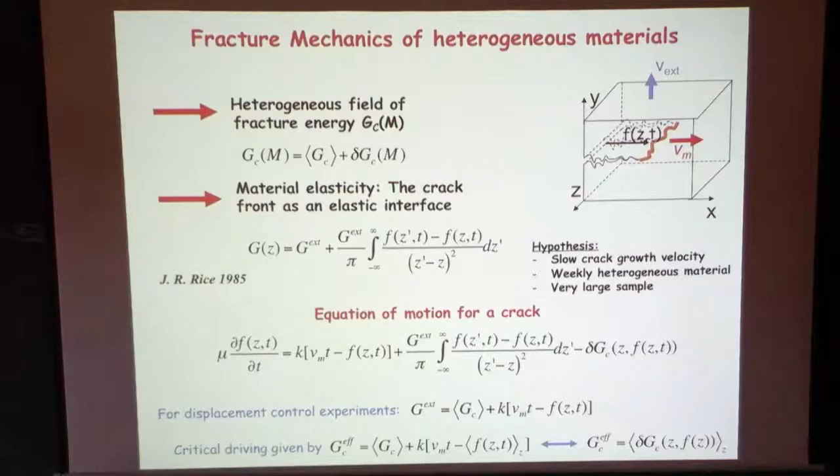Okay, there have been people who have measured Omori's law in fracture. They have measured correlation in avalanches at a rather short time scale, millisecond, and it's right now not so clear if we are talking about this type of effect, where one avalanche can be composed of several avalanches, or if we have viscoelastic effects of the type discussed by Alberto last week. Open question.